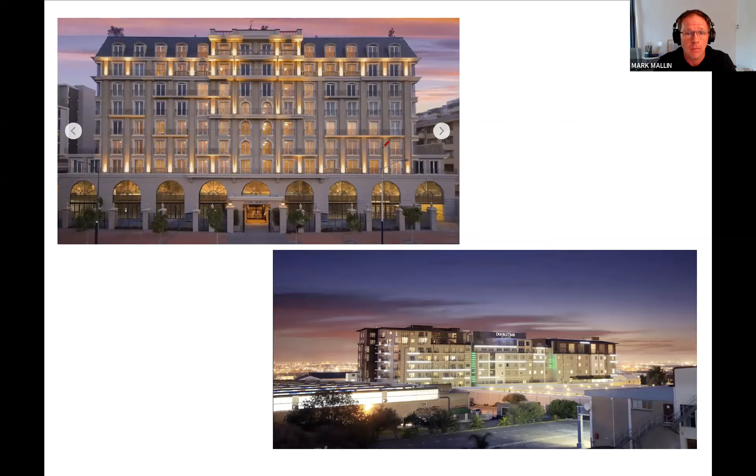And then with Shape Structures, another thing I want to touch on is we often hear, oh, computer analysis, don't rely on it. We love it, and we use it carefully. We're also almost sketching through structures. That's elaborating it a bit, but we like our models, and I'd say you should be able to play your software like a piano.

And a lot of what you'll see is this kind of structural storytelling. Well, you're not going to see that much of it. I'm going to just touch over it, but basically building a narrative, a storytelling of a structure, and iterating through designs, and away from the analysis, also a lot of sketches trying to describe concepts.

And like I say, I work within Cape Town, South Africa. The odd building or two, and when I say odd, there's one at the top. It's almost living in a concrete core. It's probably way up there on the spectrum of seismic when we get to that.

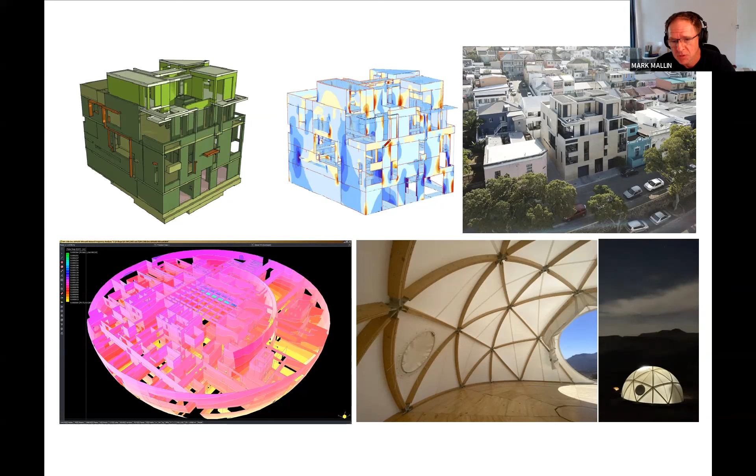And then down below, much of our work is for overseas consultants, the vast bulk of it, supporting their teams, working with their teams, learning with their experts, and then bringing in all Matt's experience on geometry and fabric structures, right down to this, so we're going from a 165 meter diameter concrete museum on the left to this 6 meter fabric dome up in the Karoo.

And a big part of that work for overseas consultants has been building on Matt's contacts with the consultants we both work for in the UK and their global projects. And particularly that's been high-rise experience, taking that into some of the redder areas of the Mediterranean map down there on the left. In fact, back to the source of the word seismic. The classical scholars amongst you will know seismic was Greek for to shake.

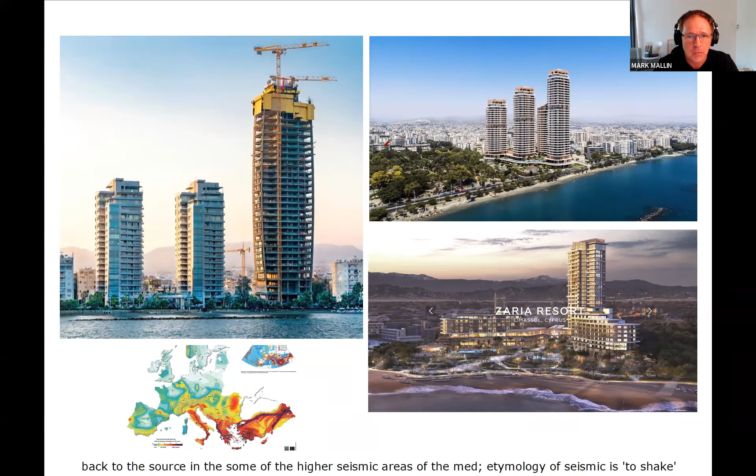Those towers have typically been residential, 30 to 40 stories. You can see individual ones, groups of them. And again, working in Eurocode 8 with their teams, learning from their specialists, and hopefully in the background, not completely relying on that, coming back to what's out there in terms of literature.

And again, my main point here is when our South African code was released based on Eurocode 8, 2010, there was very little literature behind it. There's this Bachmann book, 2002, incredible book with all its concepts, which much of the background was taken from. And later, seismic design for architects of all people, incredible descriptions, well worth getting hold of.

And then later these Booth books, the 3rd edition, actually finished in Cape Town. He notes that in the foreword, covering global principles of seismology, seismic risk, and various codes across the world, a sort of overview, very interesting.

And then specific to Eurocode 8, again, we've seen this increasing drain on our practice's bank balance, buying these books and luckily having the time to read them. And again, especially I'll draw a highlight to Jan Wium's chapter on the background of SANS 10160 in 2009. And a lot of these, again, they're at least getting an example out there. They always sort of seem to fall short of the real world, but at least there's this gradual kind of support and interest in the background.

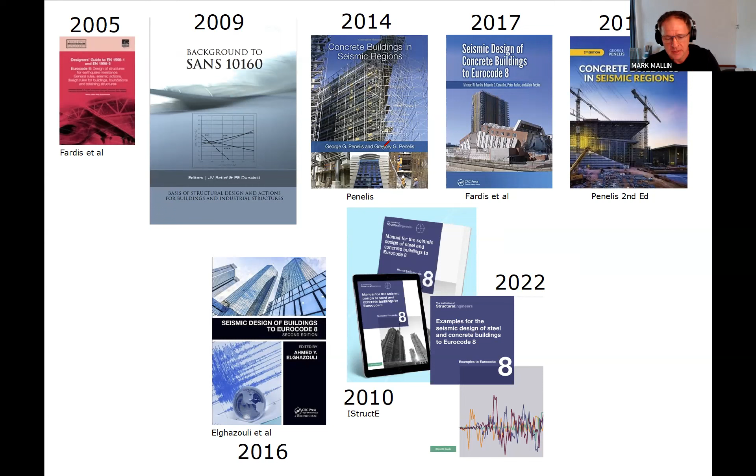And the latest there, obviously, the two IStructE publications, 2022, some specific examples to Eurocode 8. Again, interestingly, falling short of actually a reinforced concrete core example. Anyone who finds that out there in the public domain, please put it there. And again, with those books, it's not just reading them, it's reading the codes, it's talking about what they mean, talking about seismic principles. So again, a lot of our practice is a bit of head scratching.

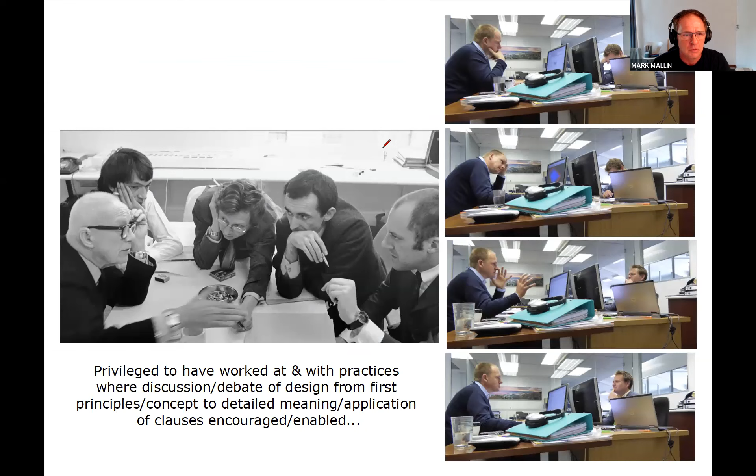I get a lot of focused thought from the guy across the desk there on the right. And between us, hopefully we enjoy it. We love structural engineering and building, and we try and do the best job we can.

The talk is possibly going to ask more questions than it answers, particularly on the buildings currently likely most vulnerable to the South African earthquake environment. So please consider it a work in progress. Even though it's going to finish at 2 o'clock or before, it's open for discussion.

So let's start with an earthquake. Let's start with an earthquake that happens here in Cape Town tomorrow. Let's say that earthquake resulted in peak ground accelerations of 0.1 G to 0.15 G, as per our code. What are the consequences? We were okay, weren't we? We had a national design standard introduced over a decade ago, with some additions in 2017, that covered buildings for this level of earthquake.

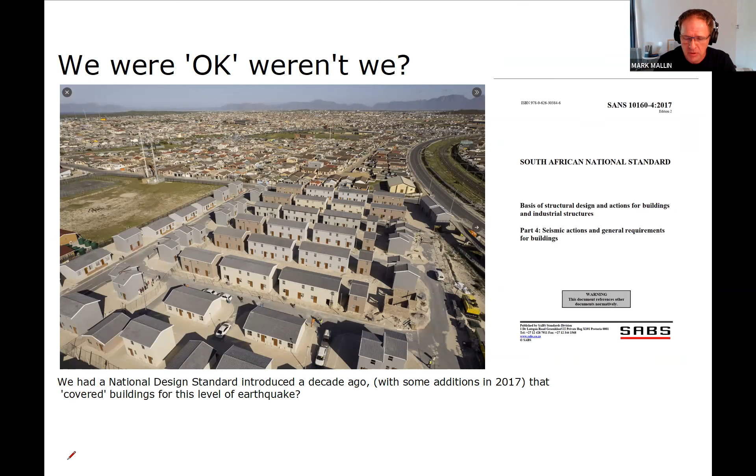We interrogated it, understood it, and implemented it, fully aware of the red lines of its scope. We looked beyond it for those buildings that were beyond it. We appreciated that the code was never written to be back applied to any building. Its fundamental basis was to apply clear layout principles and constraints on the stability elements and mass distribution of structures in order for them to be within its scope.

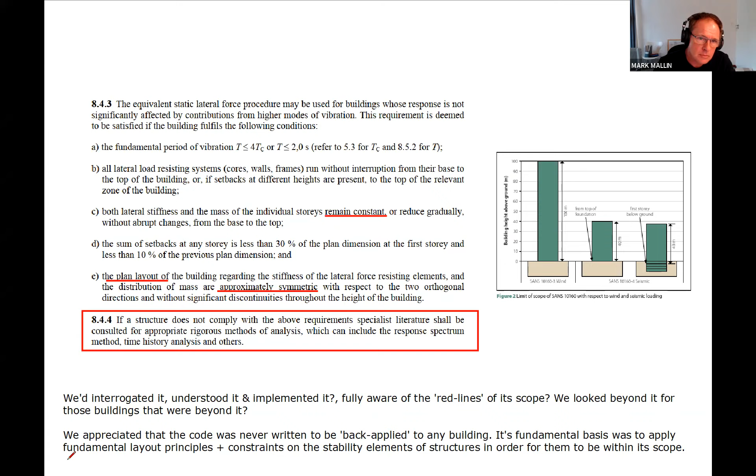Key pieces of building infrastructure had been reviewed as part of the City of Cape Town's drive towards resilience. Hospitals, fire stations, schools. And again, chatting to a forensic engineer colleague, his feedback is of 7 schools investigated for seismic compliance, none of those 7 complied. And that's not old schools, that's schools built in this last 20 years when we should be improving our building stock.

Under the banners of both inherent respect for the value of human life and resilience, there had been instilled a culture of identifying and reviewing existing and proposed buildings most at risk from the codified seismic hazard. Again, studies on our infrastructure, our interchange, the study that was done there, Koeberg itself. And as that earthquake started, we all reached for our cell phone and downloaded the City of Cape Town's What to Do in an Earthquake Guide.

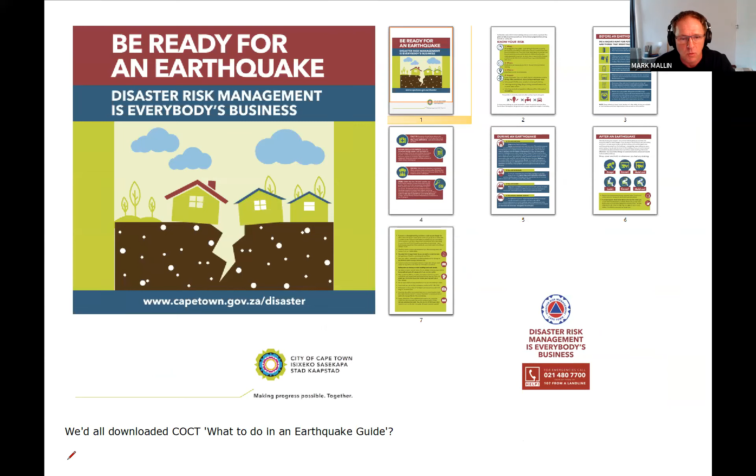What should we have done before that earthquake? Was it the case that all this had happened? Really? What had happened with our pre-1989 building stock? Do we suspect there's been a slack application of the code post-1989, post-2010? Driving around town and talking to other engineers, there's a definite uptick in an attempt at diligent design, but almost certainly there's many compromised buildings out there and under construction right now. The envisaged gradual replacing and updating of the building stock with seismically resilient structures has likely not happened to the extent it was envisaged.

Seismic history globally is frequently reactive, not preventative. It's easy to slip into this thinking in our low frequency intraplate seismic environment. We've got to be aware that the research shows that the frequency of earthquakes isn't necessarily related to the magnitude. There can be infrequent, large magnitude quakes. And again, in South Africa, we've got this general collective post-event reaction to things.

Looking most recently at something like the Wupperthal fire, immediately, wonderful efforts to restore it. What could have prevented it? And in the wider public, managing expectations, what were our clients, architects, government, the wider public expecting? So remember, possibly few are likely to thank us post this event.

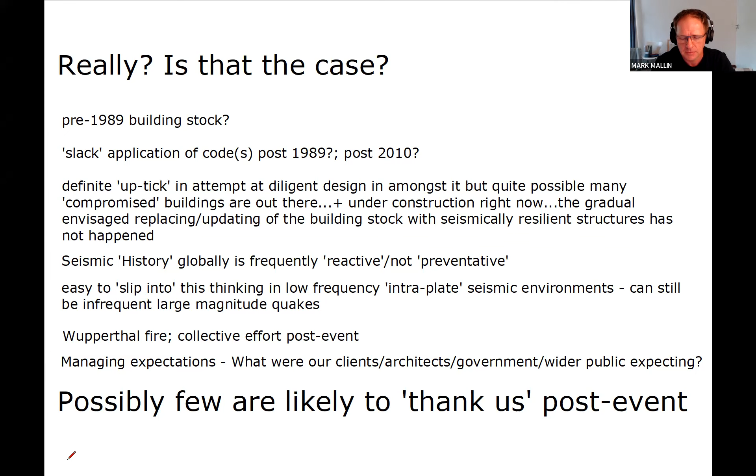And that sort of shortfall has been highlighted in various scope papers suggesting we were possibly not prepared, that this disconnect between code and practice was a real issue.

At this point, I might dwell on the usual key themes of a seismic design lecture, and rightly so. Maybe regularity, uniformity, soft story, ductility, critical region, plastic hinge, behavior factor, overstrength, etc. I'd probably then skip onto more advanced methods of analysis, more advanced methods of reducing the earthquake effect itself, and I'd probably skip any real-world design examples. I'm assuming most of us have been there, got the CPD points, then got back to the office and thought, what do I do with this?

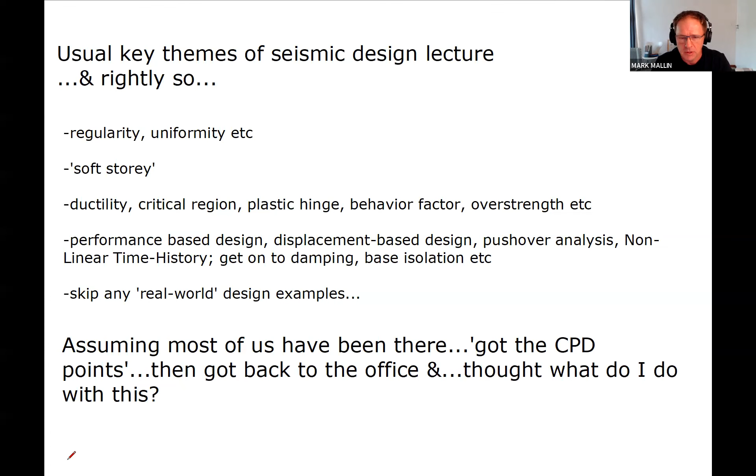Well, I'm going to touch on just those key high-level concepts. What's happening in an earthquake? We've got a fault, a rupture zone, seismic waves traveling through the ground before reaching a building site and subjecting that local ground to various motions.

What happens to the building? If the ground moves rapidly back and forth, then the foundations of the building are forced to follow these movements. The upper part of the building, however, would prefer to remain where it is because of its mass of inertia. This causes strong vibrations of the structure with resonance phenomena between the structure and the ground, and thus large internal forces. This frequently results in plastic deformation of the structure and substantial damage with local failures and, in extreme conditions, collapse.

And then top right, we've got that fundamental principle of what we're doing in modern seismic design. We're taking the structure beyond its elastic limit. We're introducing this ductility. We're letting it deform to absorb energy. And the key aspect of that is when we're reducing that force, it's still achieving close to this displacement. It's a plastic displacement that's constrained by, in SANS, the confinement rebar we produce, and similarly in Eurocode to a more quantified extent.

And then down there at the bottom, we've got our typical shear wall or core. We're looking at its aspect ratio, height to depth. We know it's a vertical cantilever. And again, we're concentrating on that critical region at the bottom. We're wanting to avoid that brittle failure and give it this ductile mechanism, create this plastic hinge, and then protect the rest of the structure above. Again, quantified in Eurocode, qualitative in SANS to the greater extent.

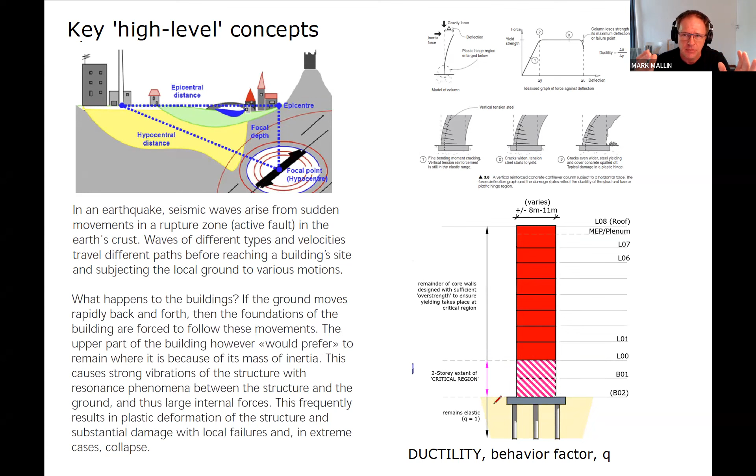And another key factor there is below, for that force to get into that wall, the structure below it has got to be protected to an extent. And again, foundations, they're expensive, they're hard to repair. Typically, guidance will be to design that close to remaining elastic. And all that's resulting in our ductility, our behavior factor, for different materials modified for different levels of assumed ductility.

And so taking that into our application of it on European high-rise, here's a typical model of where we might start. It's a basis of a structural model. It's not the structural model. It's starting to investigate that core location, maximizing the utilization of that core, looking at the aspect ratio of that core, getting gravity loads on it to try and locate columns as far away from it as possible, and working within that.

Again, we know, here's a developer, he's got a prime seafront view, he wants to sell that front space. For all the best will in the world to do the most regular building, here the core's offset. Therefore, the mass is eccentric to that core. Therefore, again, that key modal response spectrum analysis method of Eurocode is picking up those higher modes and combining them statistically into a recognized way of picking up all those effects and reducing the behavior factor accordingly.

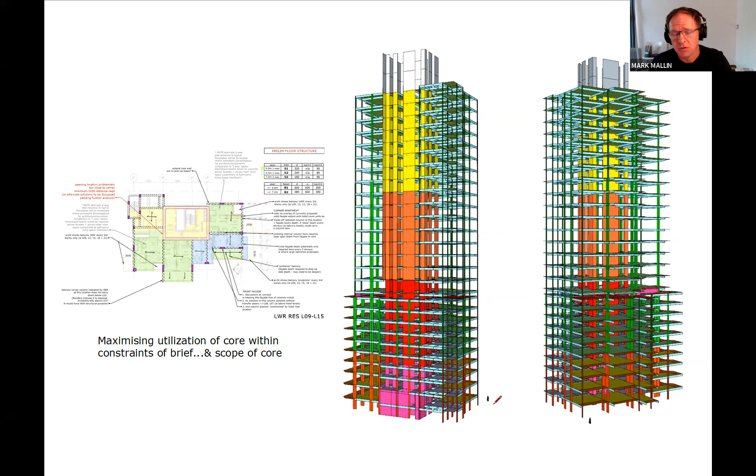And again, just briefly, it doesn't get plucked out of thin air. We've got an idea of where we're going to start, and it's this evolution of a design, talking our way through it, tweaking this, tweaking that, and looking at the results, fine-tuning it, and getting it down to something that the whole design team is confident works.

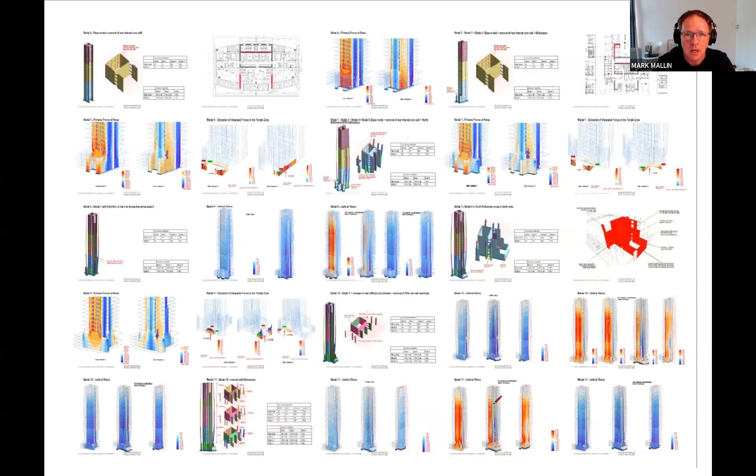And there we are. Now, from all that, a very clear structural principle, arriving regular from top to bottom. So even where architecturally openings aren't required higher up, that gets made as a dummy opening with a non-interacting structural masonry infill. And back to the principle of capacity design, all the ductility on these cores, we're looking at coupled wall systems. We're introducing what you can look at as a fuse.

So it's not just ductile at the base. There's our critical region of EC8. Each of these coupling beams is designed to fuse and give additional ductility to the structure in a ductile manner, and then push everything else that's a brittle failure mechanism beyond that. And down there at the bottom, we've got our elastic region and foundation.

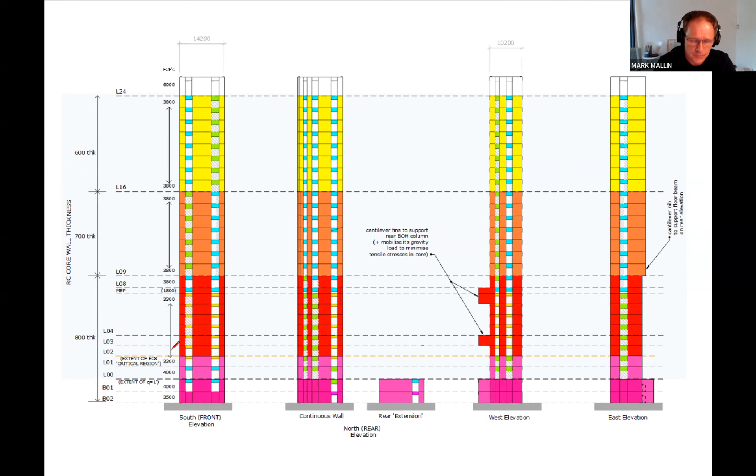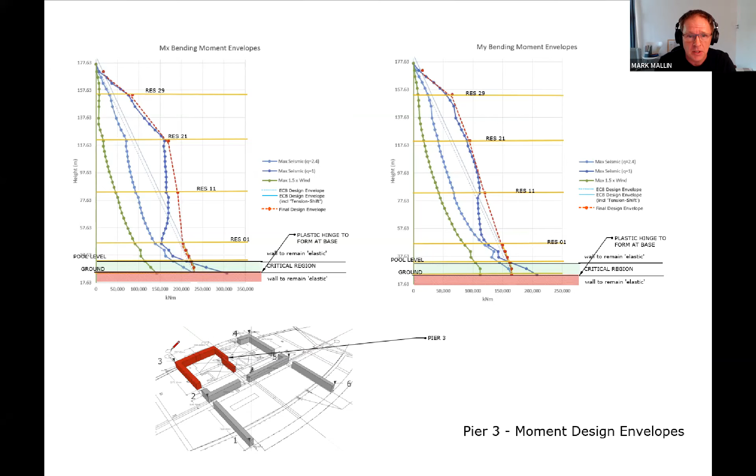And then very briefly, now we're taking that core, we're taking the individual piers of that core, top left, we're plotting various envelopes with the tension shift, with all these extra bits to make sure that the hinge is happening where we want it, it's protected below it, and it's comfortably beyond that, going right through the rest of the stack. And then taking the coupling beams between those piers, we've all got our coupling diagram in SANS. We're seeing that appear sometimes in Cape Town.

Why is it there? Because these are big, again, we know it depends on the aspect ratio of the beams. We want them, that they're going to behave in shear. We need that shear failure to be ductile, therefore the diagonal reinforcement. And again, you can see, even with these 600, 700, 800 thick walls to the base of this tower, there's a lot of coordination required to get that kind of steel in. And again, we're in Eurocode.

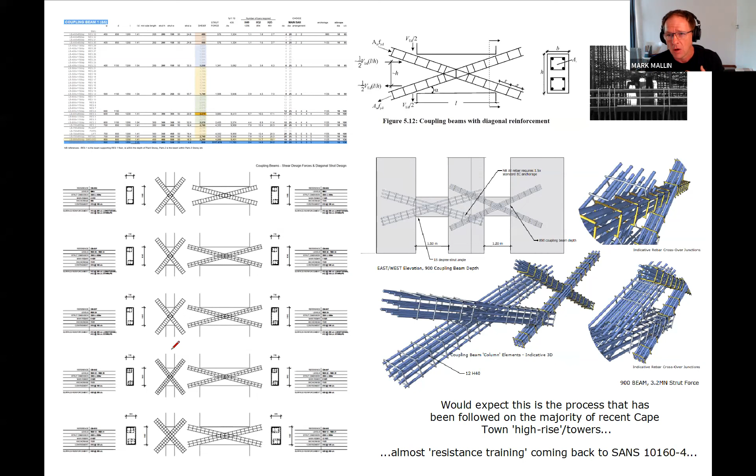That's, for a high tower, we'd expect that to be the process that has been followed on the majority of recent Cape Town high-rise towers to an extent. It's obviously not covered in the code. It requires you to go beyond it, and there's a lot there to work through. And having done it, it's almost resistance training coming back to SANS 10160 Part 4. There's a lot of understanding and interrogation of concepts that made it a lot clearer to me, coming back to projects in Cape Town.

And the key thing here is, starting on the right of this diagram, here's our response spectrum, the various ground types. It's our design response spectrum. We might adjust it actually on a 30-story tower, but it's lying right out there, way on the last sort of part of the spectrum. And as we come into Cape Town, we're coming to the limit of SANS 10160 Part 4. We're finding this hazy red line, if you like, or red line, if you want to be strict, on the limit of SANS 10160 Part 4's scope.

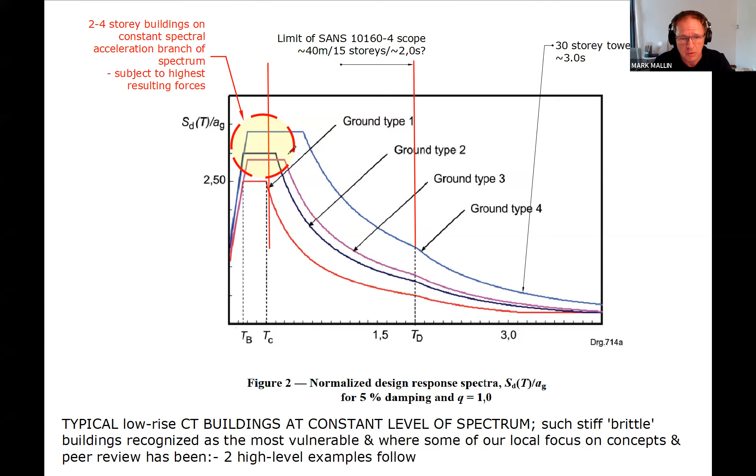And again, as we go up that line, we come in with stiffer buildings, more resonant with the ground they sit on. We can see right up there, beyond rock, all these soft materials, these things are picking up serious resonance with the earthquake, and they're naturally stiff and brittle, and therefore they're recognized as the most vulnerable, and where some of our local focus on concepts and peer review has been. So two high-level examples of that follow.

And before that, why might it be that at times our standard is not applied or misunderstood? So let's just drop into that. It's this key, again, the first page of these PDFs. We're very quick to skip to the juice, but let's look at the scope. This part of SANS 10160 provides strategies and rules for the design of buildings subject to earthquake actions, primarily to safeguard against major catastrophic structural failures and loss of life, not to prevent damage or to maintain function.

So we've got our 1 in 475 year no collapse requirement. That is, the building allows escape, but major repair or demolition is required. And then implied in SANS, it's explicit in the background to SANS, it's explicit in Eurocode, we've got this 1 in 95 year damage limitation requirement, where deflections are limited to minimize damage, and the building is very likely still serviceable.

Now, that's an accidental ULS, so all our partial load factors are sitting at 1, and furthermore, our material factors are codified as being less conservative. So compared to any other ultimate load case, we're down here on an accidental load case. All the meat is taken out, and again, just to touch on this skepticism that this isn't real. It's when it happens somewhere between that 1 in 95 year and 1 in 475 year. The building requires repair or demolition.

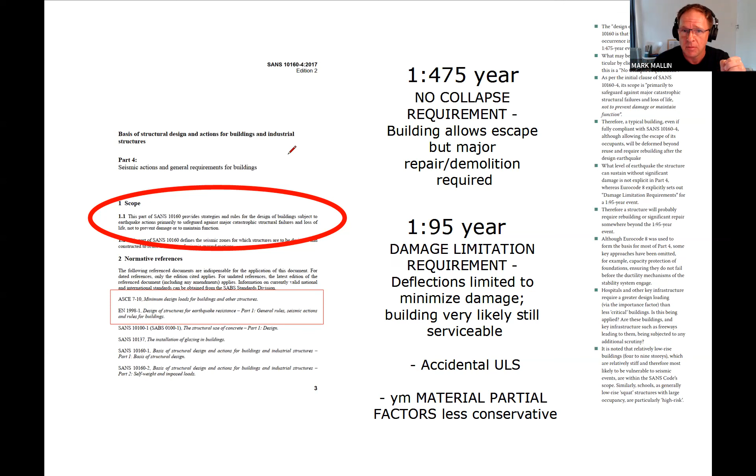So looking at schools, unreinforced masonry. Again, I'm not a masonry expert by any means. It's probably my least material experience. But we know unreinforced masonry doesn't mean completely unreinforced. It's bed joint reinforcement to minimum levels.

We know the shear values on that masonry depend on the vertical load, it's pre-compressing it and mobilizing that coefficient of friction. But we're also concerned about what's the interaction as soon as we put slip joints from the brick to concrete slabs, as soon as we put damp-proof courses in there.

And yes, there's some guidance to do it experimentally in the code. There's University of Stellenbosch's research on what those values might be, generally concluding they're pretty low. And again, something that we want to rely on for a building as important as a school.

And we're also seeing that in our safety verification, we're beyond the sort of simple rules in SANS. The verification of that building safety against collapse should be explicitly provided. We'll do that by referring to SANS 10164 part 1. We've obviously got our kind of parallel Eurocode masonry code as well, and we're reducing that material factors compared to what we do for wind or other shear effects.

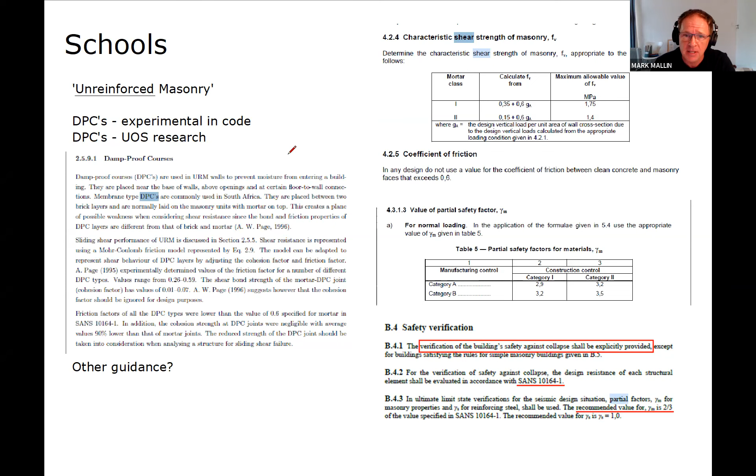So looking at a school, long, linear, that's what we typically might see. And here we were working with another engineer and talking with them about their ideas on the seismic effect. And again, breaking this into these individual, quite regular blocks, good aspect ratio, trying to get the torsional centers of these as close to the mass as possible. It's not ideal, but generally it's pretty symmetrical. It's pretty comfortable, especially over these 2 stories.

And why the reinforced concrete shear walls? Again, going back to this idea of deformation. Firstly, it might have been a desire to do this in clay brickwork and mobilize that as shear walls. But again, with the unknowns, we were very concerned about that.

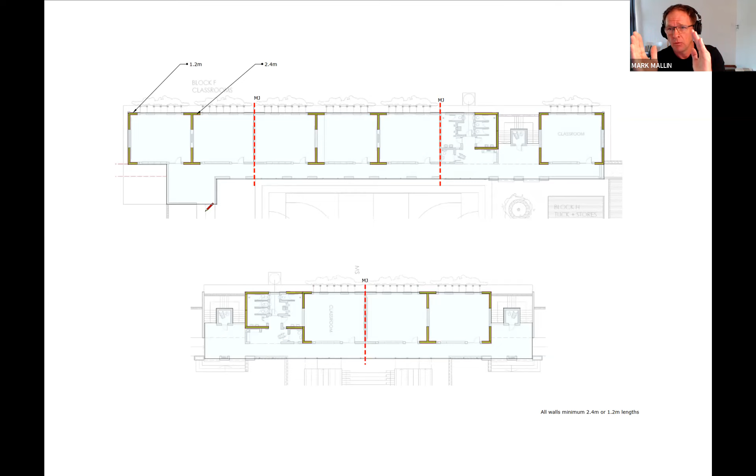And again, introducing these. Now, if I design my shear wall with my behavior factor of 5, back to that, it's going to deform the equivalent of what that force would have been before it was reduced because of the behavior factor. So we're actually trying to restrain that deformation, not mobilize the brickwork.

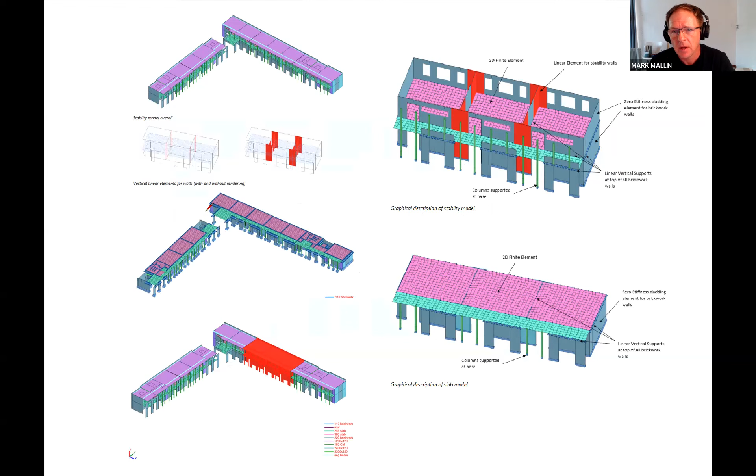And we end up with a much more robust building structure that, again, through the analysis of each of these blocks individually, is actually a very simple model, just those red structural elements with their structural properties, the rest of it just as mass, and a quick way just to work through different iterations of that, different ideas of element thickness, etc., and bringing that down.

Another interesting exercise to do is to take clauses in SANS 10160 part 4 that were non-conclusive or open-ended and just compare those with Eurocode. So for example, now we've split this building into these individual blocks. We're reading the one part of SANS that we know, possible seismic pounding of those individual units should be considered in the design of joints. There's no further guidance on that.

To Eurocode, seismic joint condition in the no collapse requirements and the specific limitations on what that displacement can be. And so between all that, we end up with a wall that's comfortably behaving, taking that seismic load elastically. Therefore, we're comfortable that the brickwork isn't getting mobilized.

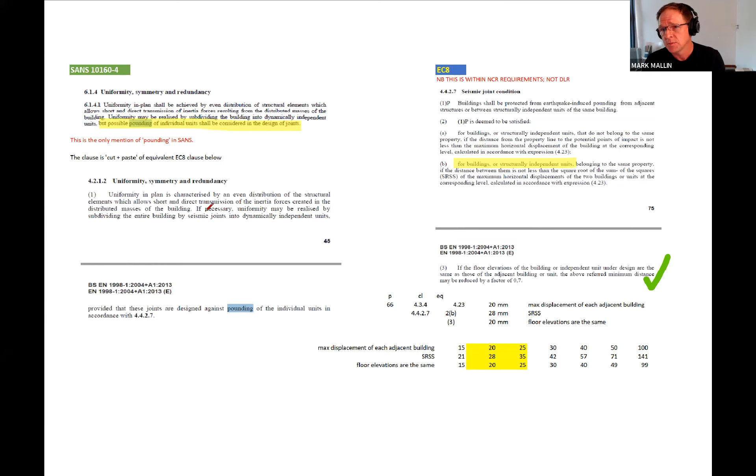And actually, after the fact, we went reading through the back catalogue of the SAICE Journal. There he is, Jan Wium, 2007, wonderful paper on conceptual design of structures for seismic. There's the diagram. It's there back in that 2002 Swiss document too.

And we're reading, again, just to reiterate, buildings of masonry construction are relatively stiff. They have a high first natural frequency, low period. So the lowest modes of vibration are located in the high region of the design response spectra. Masonry structures are thus subject to high seismic forces relative to their mass. Masonry construction is brittle, does not allow much dissipation of energy.

Ideally, masonry structures should be reinforced. That means vertical reinforcement as well as horizontal. Not a preferred construction method in South Africa. That's a lot of time on site, a lot of supervision.

Whereas with the wall, it's more of a one visit, one inspection. And that's being optimistic, but at least the critical bit is focused. The connection of those diaphragms to that wall is designed for the total force in the diaphragm. We're not relying on that brickwork connection.

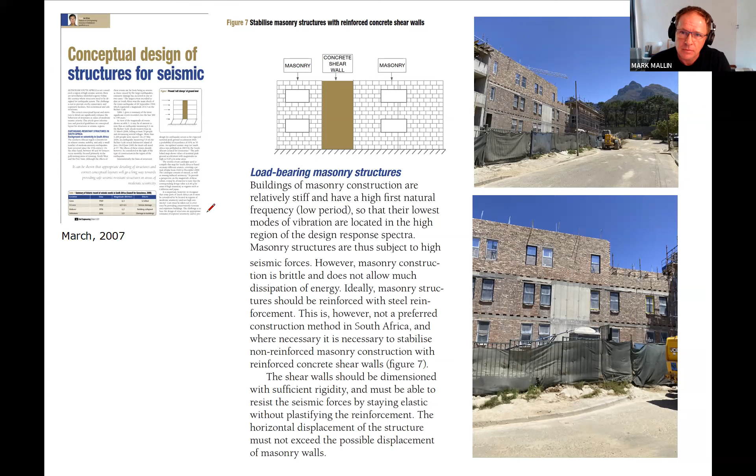Shear walls should be dimensioned with sufficient rigidity, and they must be able to resist the seismic forces by staying elastic without plastifying the reinforcement. The horizontal displacement of the structure must not exceed the possible displacement of masonry walls. And that's not our project, but driving around Cape Town, there's another one out there in the wild: someone else reading the guidance, and there's that wall clearly in that 3-story residential structure.

But often, we know we're seeing these rules for simple masonry buildings. They're basically cut and pasted from Eurocode. The background to Eurocode says they're conservative. And a better person, engineer, is going to write a parametric program that actually translates that to a realistic building. But you can see, you can start to play about with those values.

And again, if we're doing a deemed-to-satisfy design, or we're avoiding the specific verification for residential structures, there's some guidance there, but you've really got to be, I think, quite disciplined to work within it, and that's then feeding obviously all the out-of-plane stability of those walls and other deemed-to-satisfy rules for masonry.

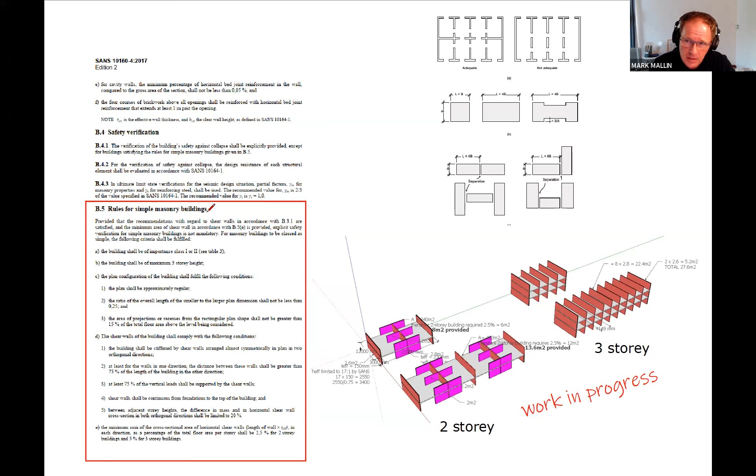Then, the second of these projects is this low-rise multi-residential. We're looking at a 2-story building where, again, we were asked to model it seismically and advise on this. And again, here it's these big out-of-plane failures of masonry walls. Are they part of the primary structural system? Are they not? This is obviously long party walls now. We think they were mobilizable as masonry shear walls, but again, we've still got this concern over the damp-proof course performance.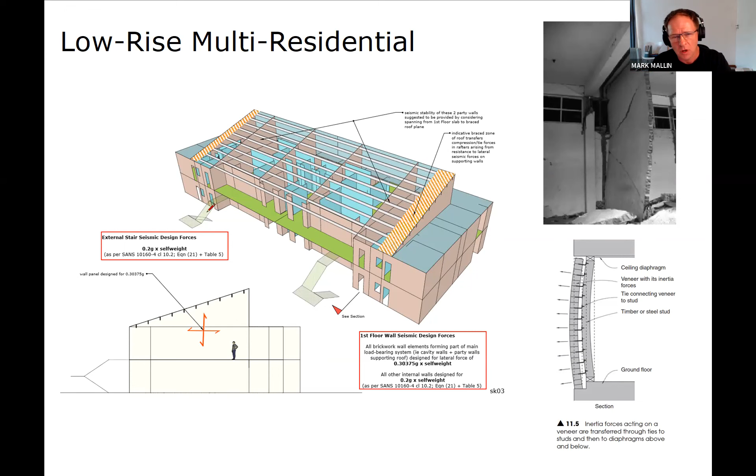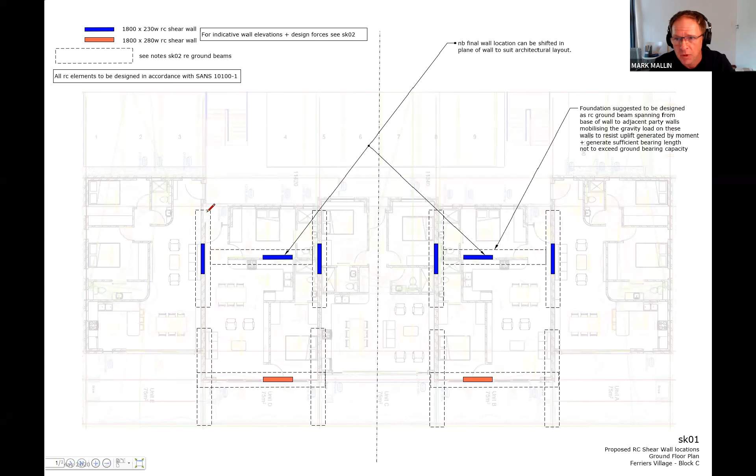And it's not a small structure, it's quite big. It's big numbers, it's big forces. So again, here's this principle of a series of orthogonal reinforced concrete shear walls distributed across that building plan. And here's our other theme that we find talking to others who are trying to design for this. We can put these walls in, we get these big base moments. How do we deal with it? Well, here was the idea of at least getting this ground beam in there, mobilizing the party walls and resisting a lot of that uplift.

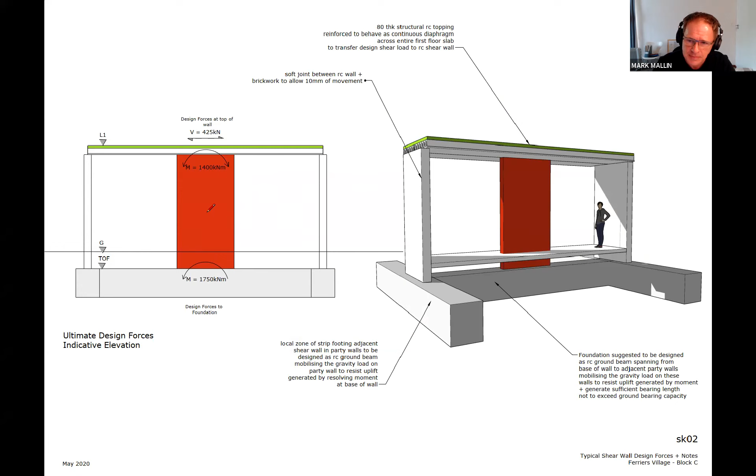And then from that guidance, we get to our typical multi-story block work. And I think this is the building type that most of us have concerns about in Cape Town. It's always the one that's brought up in conversation: if we're looking at this, where are the shear walls? Where's the verification of its rational design? I'm not saying it's not possible.

I'm not saying it doesn't exist, but now we've got the damp-proof course issue, the slip joints. We've got the one-way spanning precast. We've got the diaphragm action tie-ins. We've got the tying in of that gable eventually to the roof to stop these out-of-plane moments. And going from those 2-story buildings to the 4-story, where's the cutoff where someone actually needs to get in and see this housing as a product?

And what's leading to that in the background, briefly, is this process of self-certification. As a Pr Eng or professional engineer, it's knowing what you can't do. And currently there's no check of rational design in South Africa today. But right back to the first of our technical talks this year, Alex and Emmanuel: has a structure failed, and the difference with collapse. If a structure has failed to meet the code, it doesn't mean it's collapsed. These forces are coming only once they're tested.

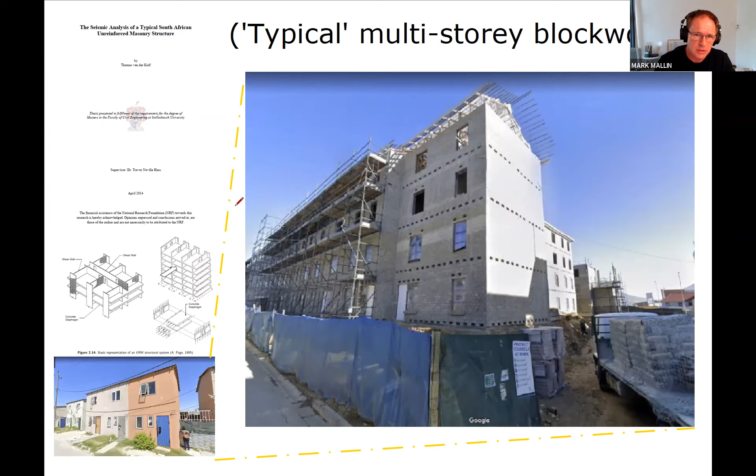And building on the sort of precedent is a precarious thing to be doing. So that could possibly be said even more strongly, but let's not start with an earthquake. Let's not repeat the history of recent other cities, countries, etc., and even the Cape Fold pre-Tulbagh series events.

There's a history of, especially this idea of legislation being in place, good practice being in place, and it being ignored. If you go back through other events, it happens again and again. And is that the situation we're in here?

How do we get all this good stuff that's coming out of academia, from code drafting committees, from geotechnics, even the recent issue of Civil Engineering Journal? You search seismic, you get papers on the soil structure interaction, trying to address that, the size of those foundations, liquefaction of soil in the Cape Flats. And again, between these design codes, where are the actual worked examples that are practical? Who can step in and provide those and make us feel more comfortable?

And in terms of knowing that this exists through the project team, I think that, again, in the motivation of this code, it was always mentioned that it had to engage architects and get them on board to implement it. And the idea that it's a risk, also knowing that we live under this threat, psychologically, can we afford to look under the bonnet?

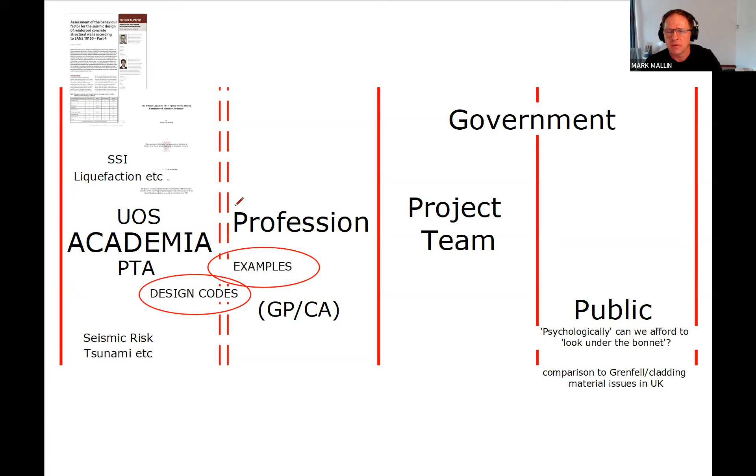And you could make a comparison to the Grenfell fire in the UK and all those properties that are sitting with that cladding, and it's a night after night thing. It does make it easy to sort of put it aside. Not easy, but you know what I mean.

And then, okay, so now let's get capitalist, let's get purely financial. Our insurance industry, I pulled out my insurance cover. What is covered? Earthquake. What is not covered? Where any of the following cause or contribute to damage: defects in the design or construction of the building, or where the structure would not have been approved by the relevant local authority at the time of construction.

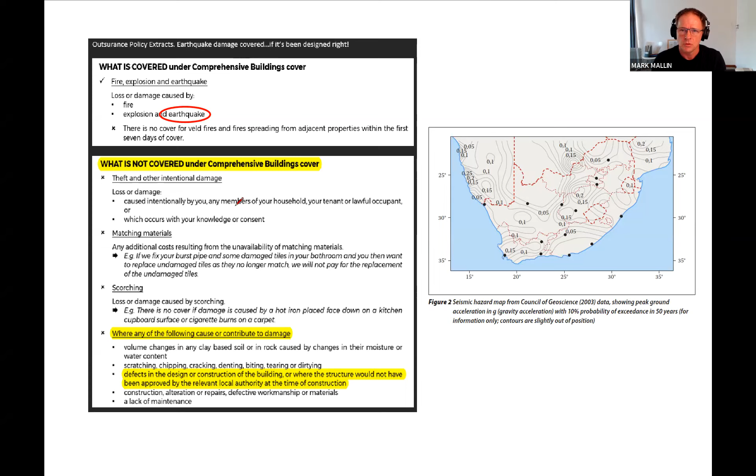Imagine putting that next to our map in front of clients and asking them, do you or do you not want this? And again, in our appointment, getting onto Form 4, we're going to say, we know fees are an issue. We know time to follow these things properly. So limit that scope to a building that's strictly within the scope of SANS 10160 Part 4 and highlight that beyond. And when we get to that form, signing off that completion certificate, what's that saying?

We're signing off the structural system for which I have taken responsibility. It, to the best of my knowledge, has been designed and constructed satisfying the requirements of the National Building Regulations. Has it? And again, back to that, some positives and what we can do, looking at, again, this modeling and assessment and scientific investigation of the seismic risk in South Africa.

I've also got to admit, when it gets difficult, when it gets tricky, I too have had doubts. And I had a very fortunate meeting. He was very kind to give up a lot of his time a week ago, and that was Chris Palmer, who has put together in the background these three quite incredible volumes following that through. Before I met him, what I would be saying is, to get on top of this, we've really got to focus all the work that's been done to say why this is a risk.

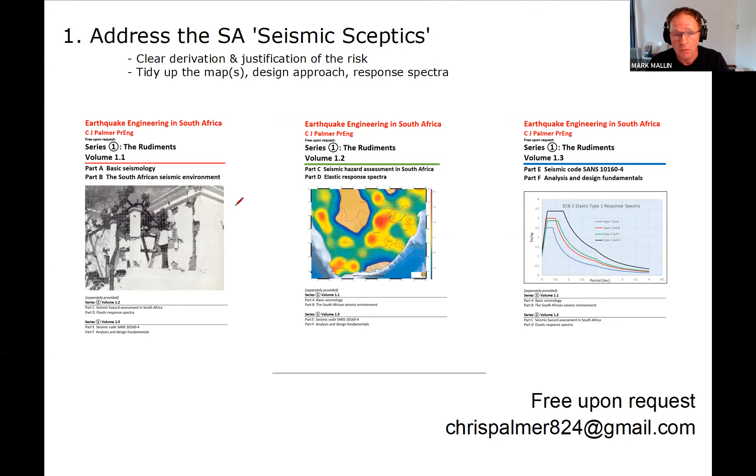But that committee is tidying up our maps, rationalizing our design approach, and let's hope it's a good effort to conclusively agree what we face. What else is out there? Again, well, what else can we do? Let's release real South African worked examples for peer review and wider distribution. Again, very easy to say, very easy to ask for, much harder to produce.

What else has changed since 2010? These online videos. We're seeing, topic by topic, those by Richard Walls, incredible, University of Stellenbosch, really clearly going through things. And on a similar vein, about 2 years ago, this Design Arc, at the Technical University of Delft, there's a whole series of YouTube videos really going from the fundamentals through to different material approaches. It's very impressive. And again, where's the guy in the world who explains this the most clearly and gets this to us?

Then we've got, again, this lack of authority checking. How do we compensate for that? Should our structural designs be open source? At least our public buildings, should we be able to access the structural drawings for those, the design assumptions, the behavior factors that were assumed?

And as an example of that, you can take not a seismic collapse, but, as all these collapses are, a whole lot of contributory causes. But that Miami, Florida Surfside collapse, its drawings are in the public domain, and very rapidly you can see that wind in that east-west direction, and apparently those 2 shear walls in a 13-story building.

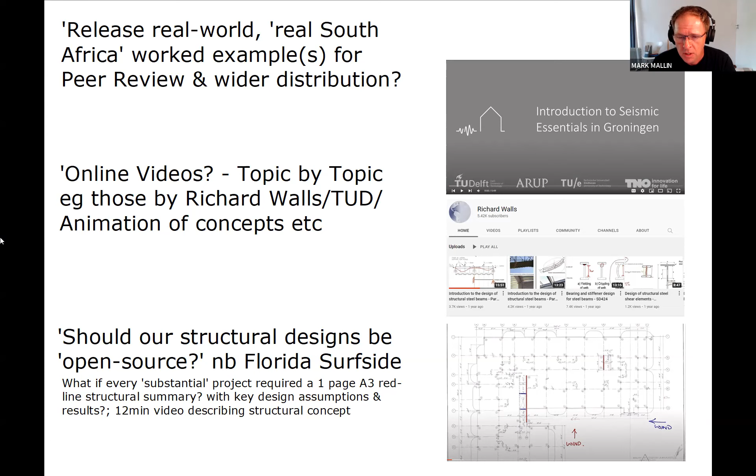It's quite incredible. And again, where's the Rolls Royce of looking at risk? This is from a year or 2 ago, Groningen in Europe, fracking and its influence on changing the seismic environment, and they went building by building with all sorts of quite incredible modeling. So it's Rolls Royce stuff. This was every building. Is there motivation for just a couple of our key buildings, just flying over Google Earth, driving around, seeing what we think is most at risk, and some impetus from the city to actually just commission that?

And there's some shake table work being done. There's obviously the Stellenbosch document on masonry, but again, it's theoretical. It's not addressing conclusively where we stand, and it's always raising, what about the tie-ins of diaphragms? What about the out-of-plane stability? It's certainly not a sign-off by any means.

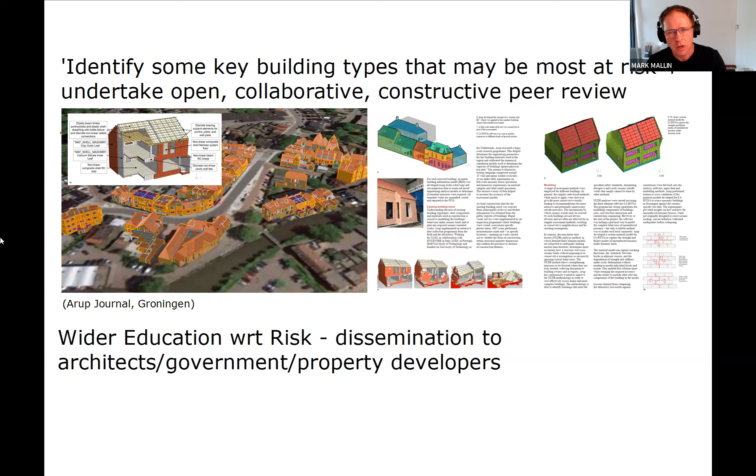And then this wider education with respect to risk, the dissemination of that to architects, government, property developers. Again, are we poor at sitting down at the client meeting, holding this up and saying, boom, boom, boom, this is what's required, I'm not going to veer from it? And I know that's what we should be doing.

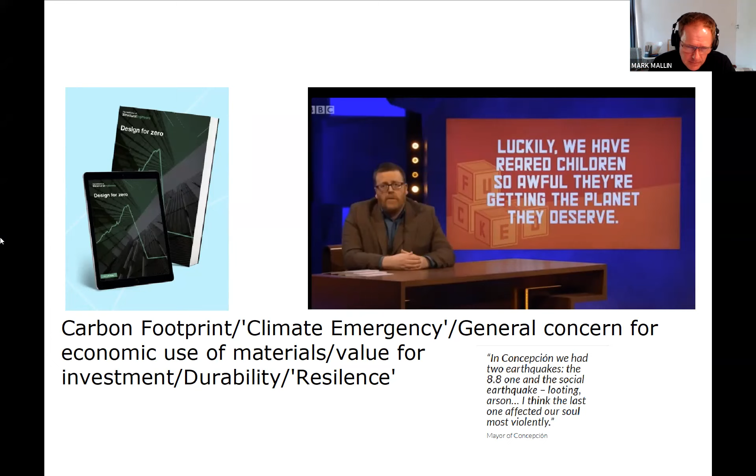So in conclusion, it's very easy to get drawn into this topic, kind of hypnotized by it at the expense of everything else. We know there's all sorts of other things feeding our structural design. Gravity's on 24 hours a day. Wind, when it comes, at least there's a warning, maybe 2-3 days before a storm comes. A fire, awful, but tends to be a local event, especially these days not destroying everything in one fell swoop. Earthquake, there's no warning. It comes and it takes everything out. And really, that's the concluding note. Thank you.